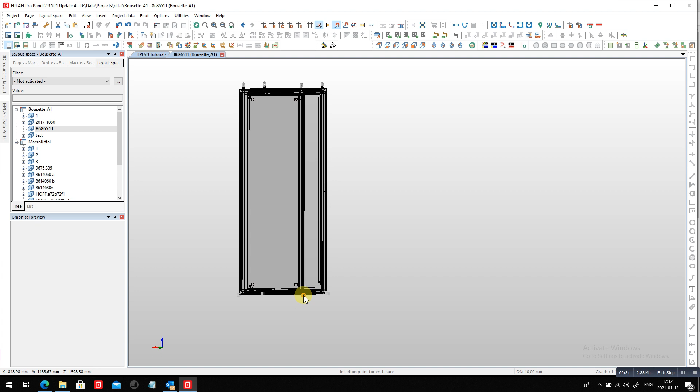Technically, when you insert a panel - I'll pick one enclosure, the 8686 500 - and place it, you may know that you can place Rittal panels nicely one next to each other. But this is not my intention here.

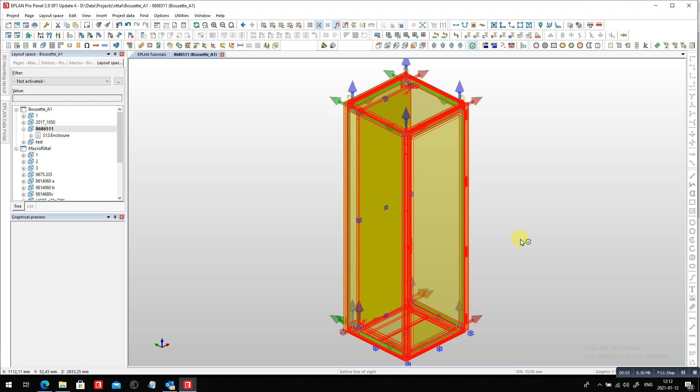My intention is to show you the lines of accessories. When you look at the front side, you have a couple of accessories placed by default. Some of them, like the back door, you may not want - you may want a glazed door instead, but not the standard one that's typically placed. You want the glazed door, but rotated.

So what I'm going to do is insert the accessories - this is typical to Eplan and Pro Panel, we have a list of accessories. Here we can see the doors TS600, and we typically only have one door here.

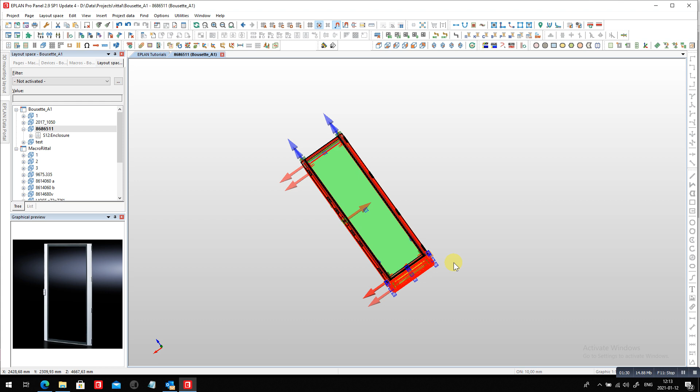When we place it, let's say here in the back, you'll see the handle is actually on the wrong side. If we look at the whole thing from the back, you can see the handle is here on this side. This is not what I want.

So let's undo this very quickly, and move over to look at the individual door. I'm going to flip it upside down - the 8610-685 - but put it with a right-hand side handle.

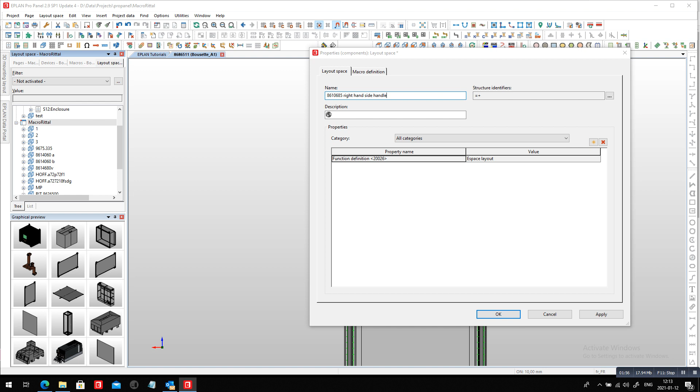What I'm doing is basically using the original. I could take the original directly from the data portal - type in the search, type in the part number I'm interested in. It downloads the door, and you can see it here. This is how a typical door looks, but the handle is on the wrong side. What do we want to do with this?

Well, we want to flip it - so the bottom and top are reversed. In other words, the placement area is entirely rotated. So you're going to place it on this side.

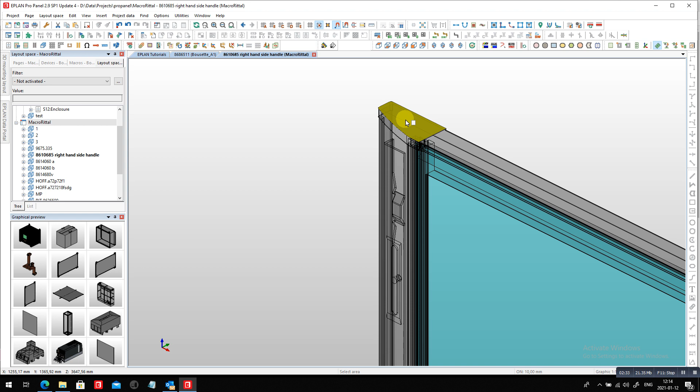The other thing that's not exactly true - when I look at it from the top, suddenly it flips front and backwards. Well, not really. If you go into the device placement area and rotate it by exactly 180 degrees, you get your glazed door again as you wanted, facing you.

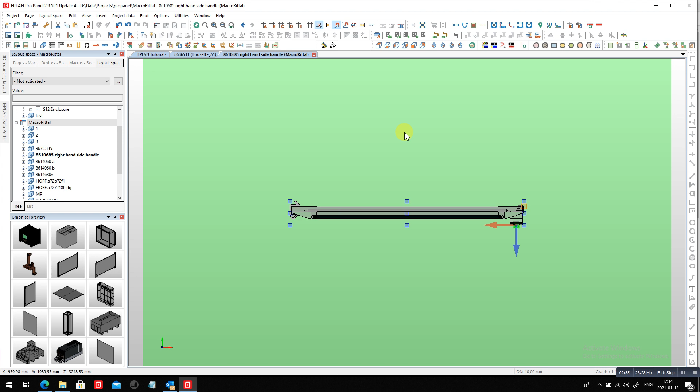This is exactly what you want, because you want the front facing you. When you look at it from the top, you want it facing correctly. Anyways, you get the right part in the right direction.

Now the only thing left is that handle, which suddenly is on the top right-hand side in the back, and you want it down at the bottom, because this is your reference point for every accessory placed with Eplan Pro Panel.

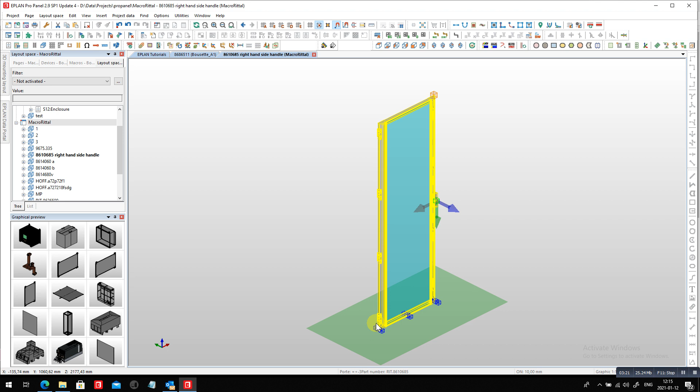So how I'm going to do this is basically just place the handle. Now, one problem I see here when I zoom in is that suddenly the handle is really not exactly easy to touch.

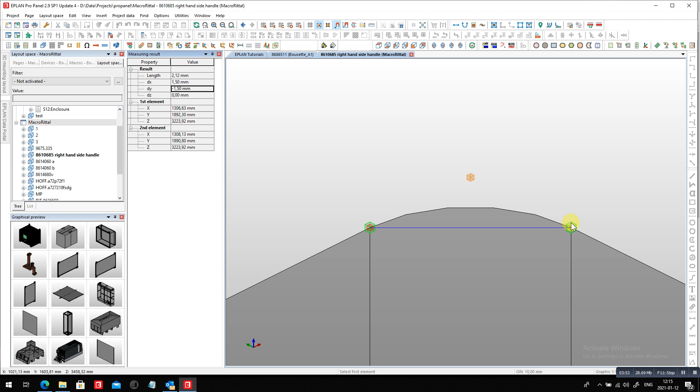Well, let's do a small measurement. I go into my layout, I have some measuring tools. I can click exactly from here to here to see what the distance is, and I can recognize my offset is about 1.5 millimeters exactly, right, from these two points. This is exactly the information I needed.

So let's go back to our panel here, and let's now redefine the so-called handle.

I'm going to use the so-called offset. When doing the placement offset, you have to figure out what is X, Y, and Z. Remember, the red line represents X, the green line represents Y, and the blue line represents Z. So here, represented by the green, is the Y, and I'm going to offset it by exactly 1.5 millimeters.

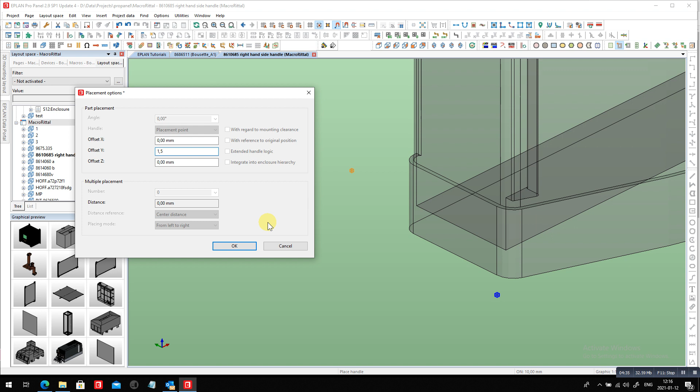This way you can see I can target this point that is easier to snap. We got the perfect handle.

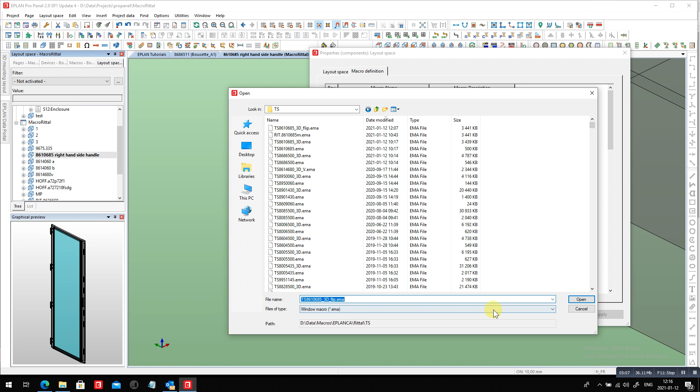Now, last but not least, is to figure out what will be the name of that macro, because I can't use the same macro, I have to use a different macro. The macro that was originally used was saved under TS8610685, and I'm going to choose a new name, basically the flipped name. Because I'm flipping it upside down, I just call it flipped.

The macro is now created in EPLAN, ready to be used. Now, when I say ready to be used, I have to go back to my parts management and look for that part number 685, because the original door is correct but has the wrong macro attached to it. I could just change the macro to that flip macro, but then I wouldn't be able to choose between left and right. What I want is to choose between left and right.

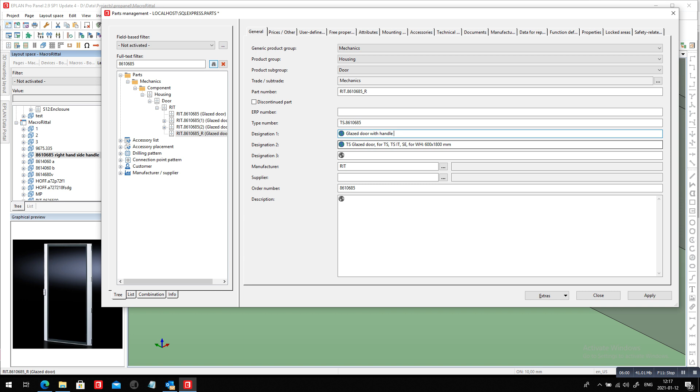So I copied and pasted this macro, and this is going to be the glazed door with handle on the right hand side. The only difference isn't really the part number I'm going to order at Rittal, but really the way I'm going to handle it inside EPLAN. I'm going to use this new macro I just created. If you go by date, you can find it, probably at the top or bottom, flip. That's basically the macro I just created, the flip variant of that door.

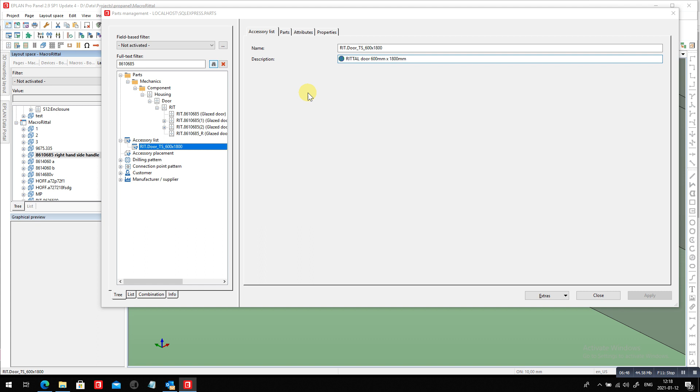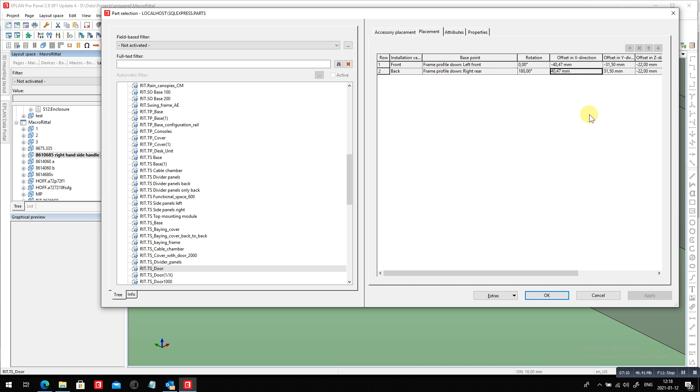Now, once this is done, remember in EPLAN every accessory is placed through an accessory list. So I'm going to add this new part number here so we can see the glazed door, and every accessory or part number is placed based on some accessory placements or specific reference points. When we look them up here in that Rittal TS door, we had defined a placement for the front and a placement for the back side of that same door with exact offsets. But I don't really have to rethink those because I took the door, flipped it around, and put the handle exactly in the same spot it was originally, just in the flip version. So I don't really have to worry about this. This is basically done in the background, and this is what Rittal did for us as work.

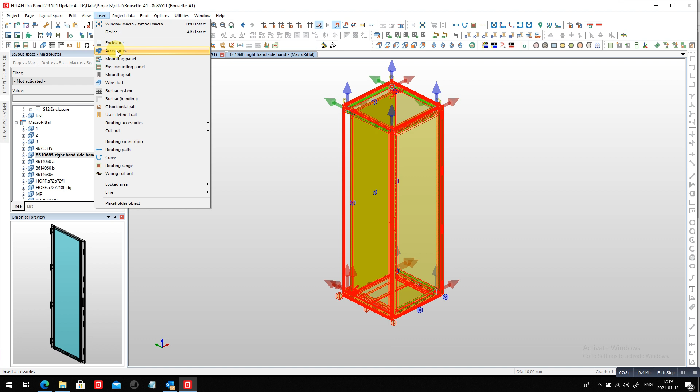Now what remains is to go back to my original panel that doesn't have any backside. As you can see, I can see through here. I'm going to add a new accessory this time, because I added in this Rittal TS 600x1800 a right-hand side, so it's basically with the handle on the right-hand side. The image is wrong because I didn't flip the image, but I didn't really care about that.

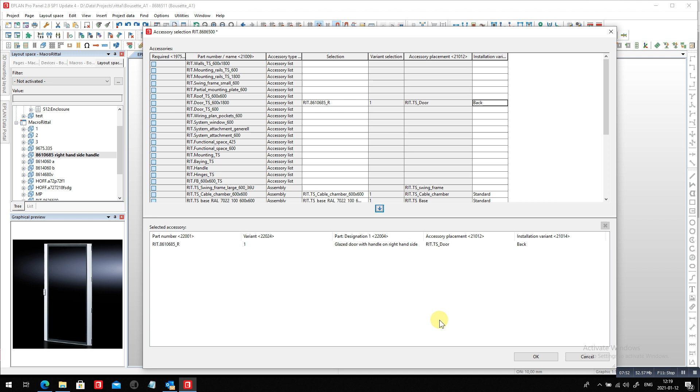But I can still choose front or back. I'm going to choose the variant back, because that's where I want it. And I just, boom, place it. You can see it's placed. You can actually see that the handle is on this side. So if I rotate it, it's exactly on the right side where I wanted it.

So this was Roland from EPLAN, giving you a little bit more insight into how we can get these door handles on the American side. Let's call it like that.